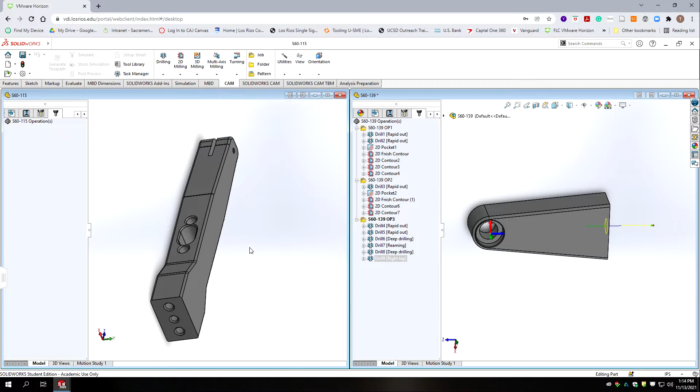So let's look at comparing in SolidWorks our two parts that we're working on. So on the right hand side window I have the 139, which we should have programmed in the last class or last tutorial, and then over on the left we have our 115. Now if we approach this from a similar standpoint, where we start out in an orientation something like what we see here, on the 139 we milled off the end, we did the radius, and we did the hole over here. It's a different size, but we could do that.

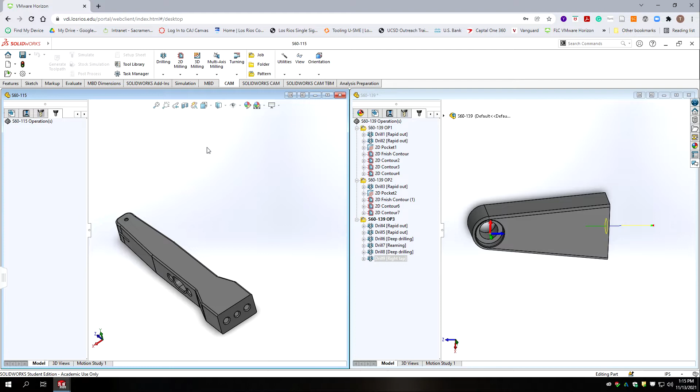And then we have work to do on the side here, and this is a flat plane that's parallel to the plane on the opposite side, so that could be a clamping surface. And then we have this slot that needs to be cut from the end with a saw. So the overall length of this part, if I were to measure it, is about 4 inches. So in a 6-inch vise we wouldn't be able to have both sides sticking out. So we'd have to assume that we're going to make a special fixture to make this. Perhaps the first operation is done on the vise, and then the following ones are done in some sort of dedicated fixture, and then perhaps we stand it up on end in a vise.

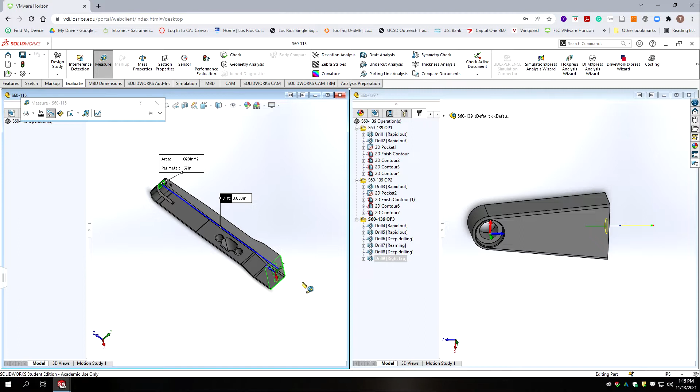But okay, so here we go. We're going to try to copy the operations, but I want you to keep in mind that our operation numbers may change. I just want to be able to recycle the code that we've used. So I know op3 was all the drilling in the end, so we definitely want to right click on that one and select copy and go over to the 115, right click, and we're going to paste that one in there. Okay, so it looks like it automatically added op4 to the number. I'm not sure if that's actually the op order it's going to be.

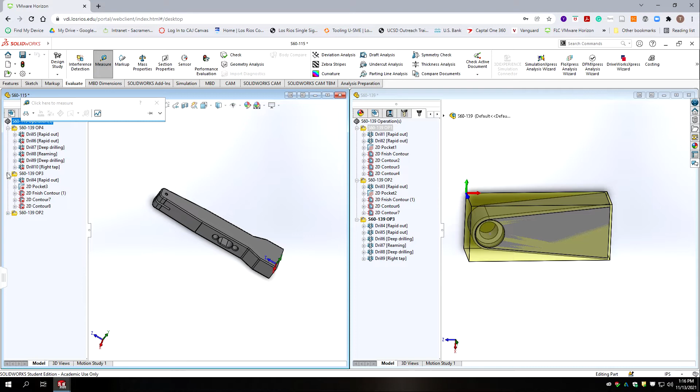And then we have this routine here. We're going to copy that one as well, and we're going to paste it. And then we're going to go over to the first op and do the same thing. Copy and then paste. Okay. Alright, so we're all out of order. We got different orders. Let's collapse this down. And I'm going to put them in the order in which they were done in the other part number. So if I were to drag them around, I've got them in the order in which they were done in the 139.

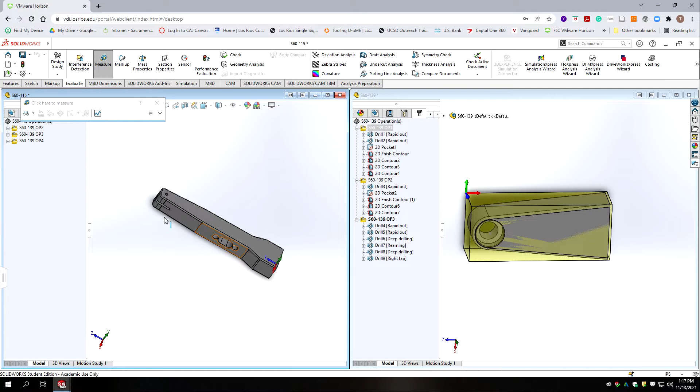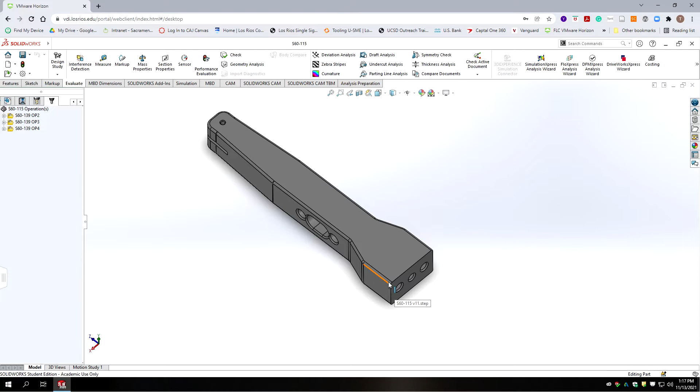Okay, so I'm going to go ahead and save in both files just to make sure I retain everything. Now I'm going to close the 139. Okay, let's expand it out. And I'm going to zoom to be in an orientation like you'd be in a vise where you're standing where the operator is. So again, we're going to be milling just enough down to get the radius. We're going to drill this hole. We're going to mill off the end. We need to make our stock. Okay, so let's go to what's called Op2 here, and we're going to rename it. First, the correct part number, Op1.

Okay, let's go into the setup. We're going to go edit. Yes, we're going to reassociate the geometry. So we've got our part, and I'm going to assume we can hold it in the vise for this first operation. Okay, so we've got the model highlighted. We're going to call this the 115 Op1 instead of 139.

We're doing milling. And on our stock, we need to set our origin before we mess with the stock. So our origin is going to be selecting Z, and we can select an X-axis on this one. So Z and X-axis. Our Z is going to be in the plane of the top of the material, X is along one of these parallel lines. Okay, and that's pointing the wrong direction, so we're going to reverse the X-axis. We're going to go to stock box point, and bottom corner 3 is fine. That's where it was on our last job.

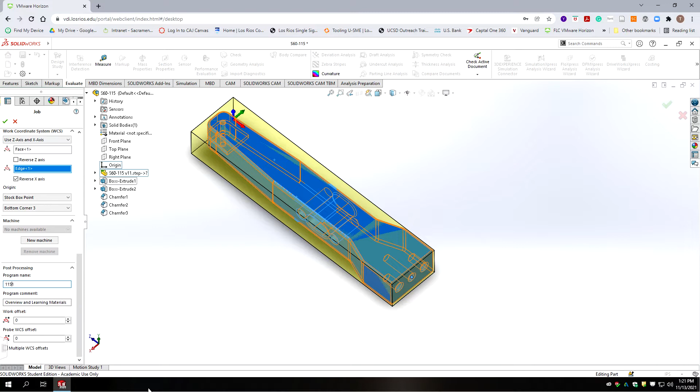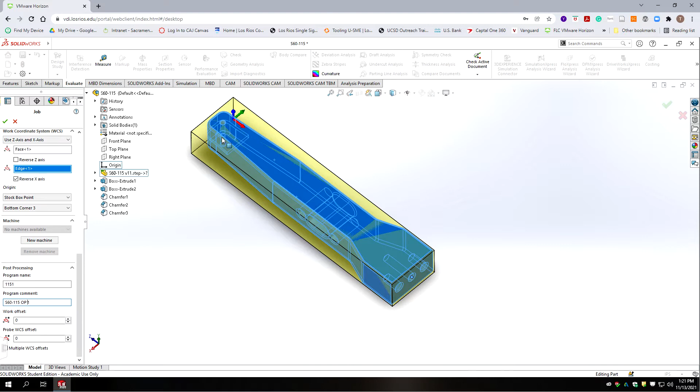Okay, we're going to scroll down. We're going to change our name from 139 to 115. And you might have caught this mistake in the last tutorial, but this should have been S60-115 Op1 instead of what I pasted in there. I had something else from Canvas accidentally in my clipboard. Okay. Alright, so we've got the stock now set up, and now we're going to start our machining.

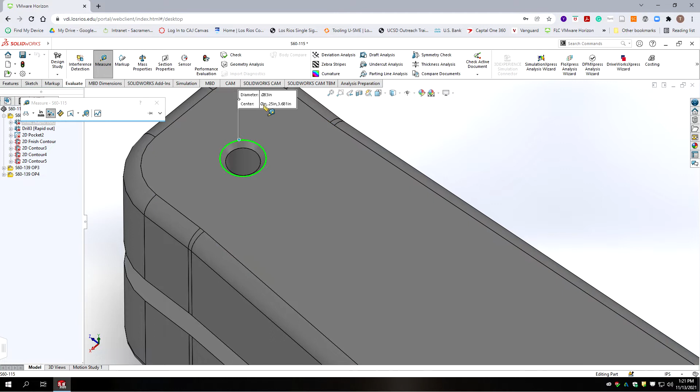So the first operation was a spot drill, and it spotted out a much larger hole than what we have here. So we're going to come in and evaluate what this chamfer edge is. So if you go to evaluate, measure, pick on the outside diameter, we have an 83 thousandths hole. Alright, so we're going to go back to this routine, go edit, yes, and we're going to keep the tool, we're going to keep all the feeds and speeds at what we did in the last one.

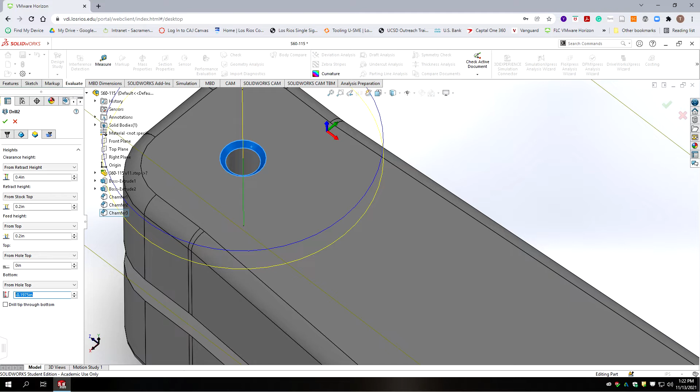We're going to select our hole, which is just going to be the chamfer surface, and then we're going to go to depths, and we're going to leave all this the same, except we're going to change this to negative 0.083, which is the diameter of that countersink, and we're going to divide that by 2. Okay, so we have a much shallower drill point. Okay, and we can keep the rest of this at default and accept. So we've got the first routine done.

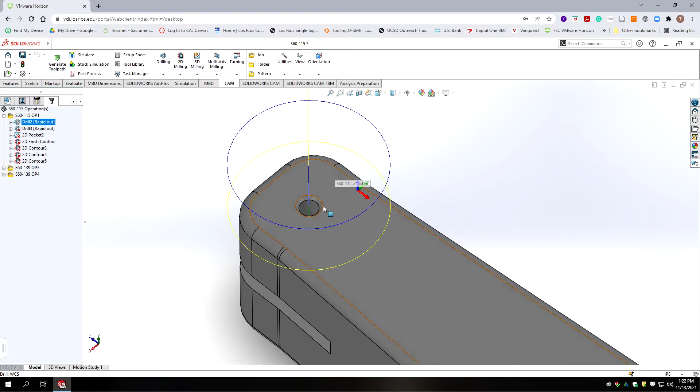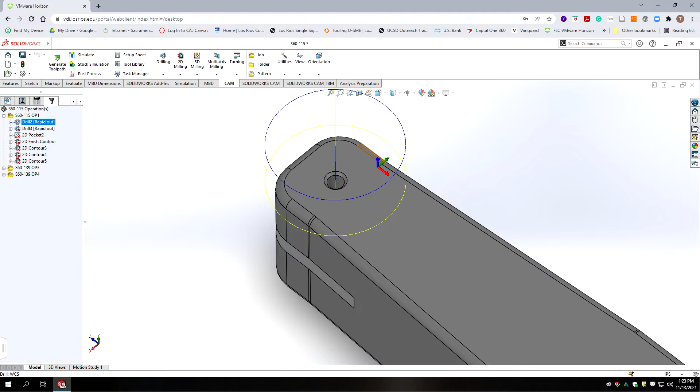Now, to follow up on that, we're going to go ahead and drill through the part. We have two choices. One, we can drill all the way through, or we can drill halfway through and drill the other halfway through from the other side. It's kind of semantics. With the small diameter of the drill bit, it could have some drill wander, but what you do to combat that is you do lots of small pecks. Okay, so we might have it wander a little bit and be off center.

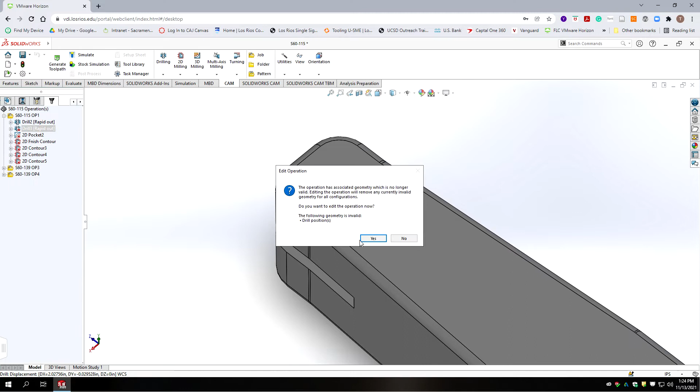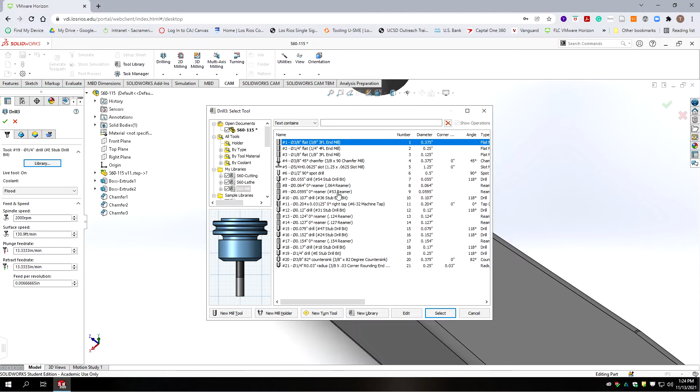Take the next operation. We could either edit it or we could delete it and make a new one. Let's just go ahead and edit for posterity. I'm going to pick that up and we're going to change our drill bit from a 1/4 inch drill bit to the drill bit that we would use preceding the press fit reamer. So our press fit reamer, it's the number 53 reamer. That was the reamer we were going to use. So the drill we use for that is the number 54 stub drill we're going to select.

It's reset its RPM. I think that 5,000 is too fast for steel, so we're going to go 2,500 with this small diameter one. We're only going to go 8 inches a minute on this, and our plunge rate is going to be 8 inches a minute, and our retract 8 inches a minute.

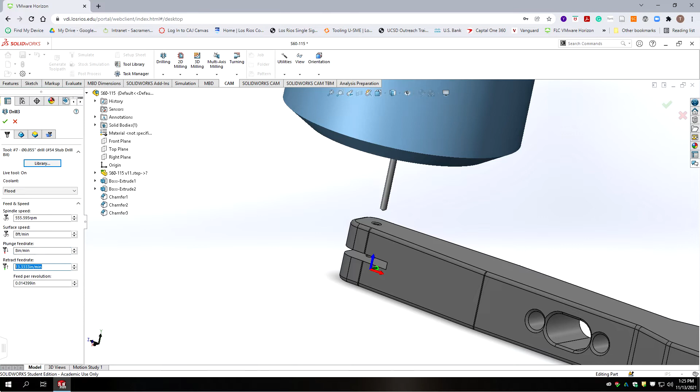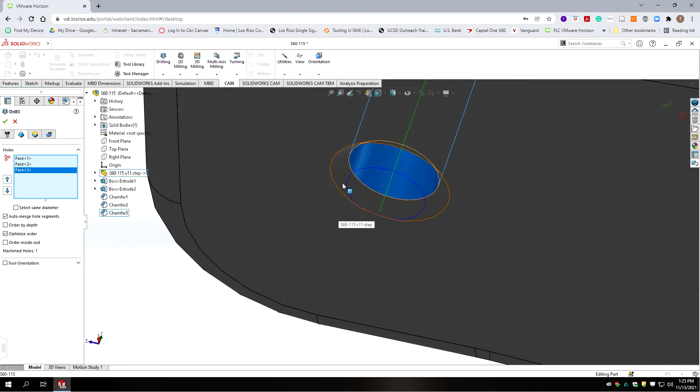Our next tab, we're selecting what is the hole we're going to drill. So we're going to start with the chamfer. We're going to do the cylinder, the cylinder of the opposite side, and then we need to rotate around and get the chamfer here on the opposite side. And we want to auto merge that so it treats it as one drilling cycle, not as separate drilled holes.

Okay. We're going to go to the heights tab. We're going to keep all the stuff at the beginning at default. We're going to go from top of hole to bottom of hole, but we're going to break through and we're going to go 10 thousandths deeper. So that's fine. It's calculating a different breakthrough value because it's a smaller diameter drill.

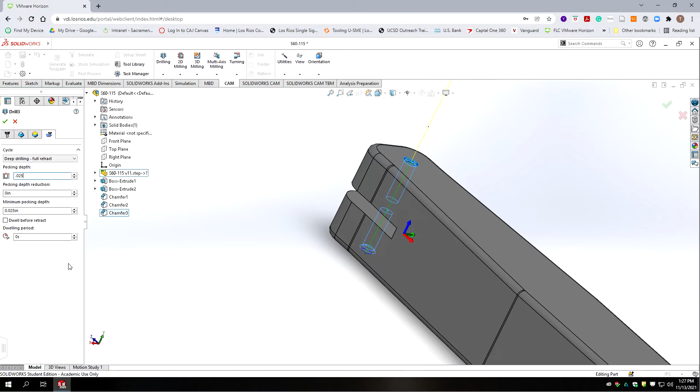The last tab, we're not doing a drilling and just rapid out. We're going to do a deep drilling cycle. And I want to go 55 thousandths drill. And if I were to go half of that, it'd be 25 thousandths. So 0.025. We're just going to leave that where it's at. And so it's going to peck until it gets all the way through.

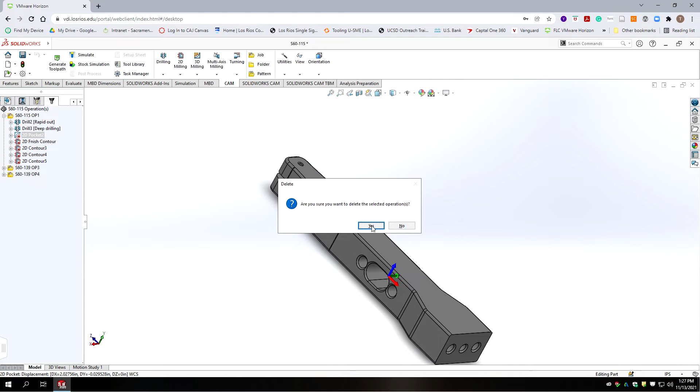Okay, so we've got our 16th drill going through real slow, lots of pecks. Probably take an hour to get through, but we should have a fairly straight hole when we do that. Alright, so now the next is the pocket, and that was to do the pocket for the bearing. We don't need that on this routine, so we're going to delete that. The finished contour, we don't need it for this operation, but we could possibly use it for this here. So I'm going to drag that operation down to op 3 and we'll deal with that later.

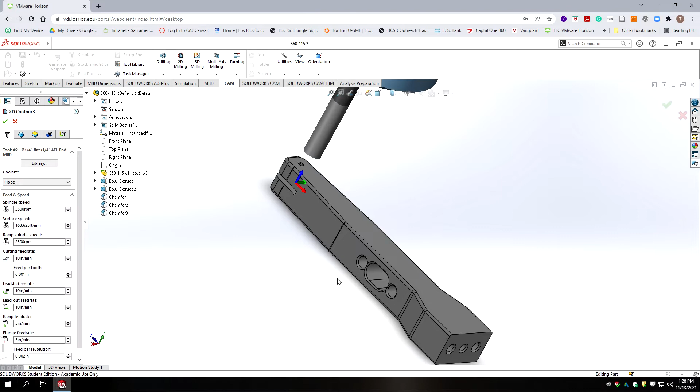Okay, so now we have our 2D contour, and that was with a 1/4 inch end mill. Okay, and I believe that trimmed off the end of the part over here as if it's sticking out the end of the vise. Okay, so we're going to keep all that at default. We're going to go to the next tab and we're going to select a different set of edges. So it's here, and it gives us a crossed. We're going to go to heights, and we should be able to leave everything as it is. It's going to go to model bottom and then machine past by 10 thousandths.

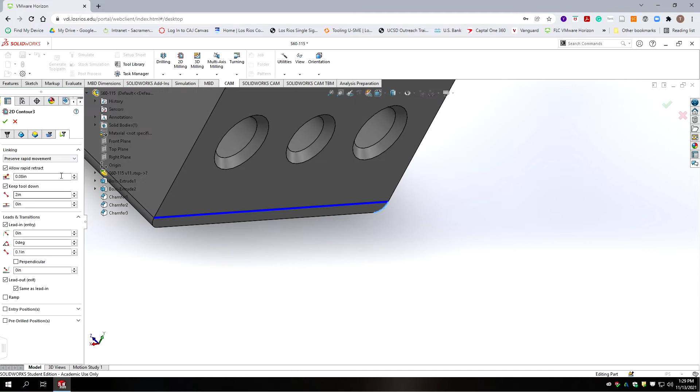Go to the next tab, and it's all of our rough and finishing passes. If it worked on the last part, we'll use it on this one. Go to our last tab, and it looks like we can leave everything at default there. Hopefully it'll come out the same way. Okay, so we got our horizontal rough cuts, we've got our straight lead-ins.

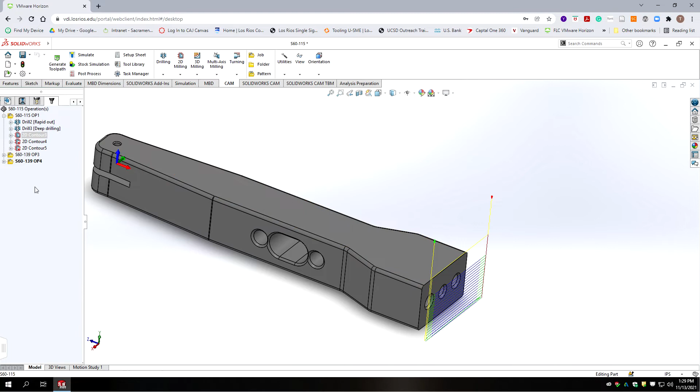The next routine was to clear out material so that we've cut down beyond the radius so that our corner rounding end mill can come around and have clearance. So we're going to right click on that routine, which is also the 1/4 inch end mill. Contour. We're going to keep the first tab alone. We're going to go to the geometry tab. We're going to select the first edge, and it should wrap all the way around. We're going to go to the heights tab. We'll leave all this at default. We're going to go 10 thousandths deeper, just like we did last time.

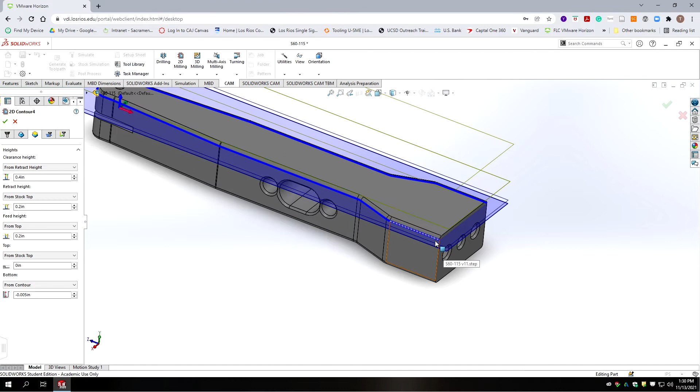And the roughing passes on the sides, I'm going to do a few roughing passes on the outside. It's really just going to cut air over here, but over here it should clear out quite a bit of material so that the corner rounding end mill doesn't touch anything on the scrap side of the part. Then we move over to the last tab, and we should be able to leave all this at default as well. So we select that, and we should get a routine that has 1, 2, 3 rough passes and then a finish pass, with it leading in from the edge.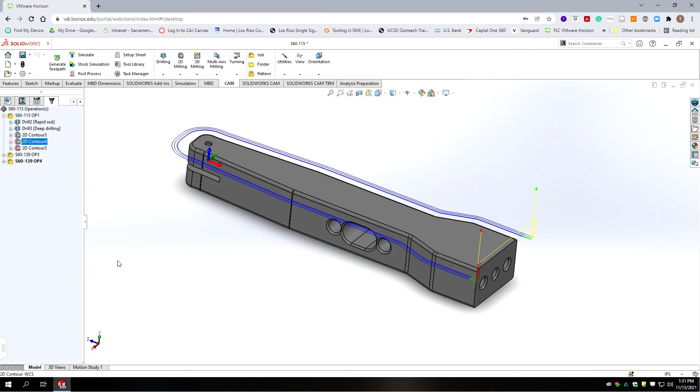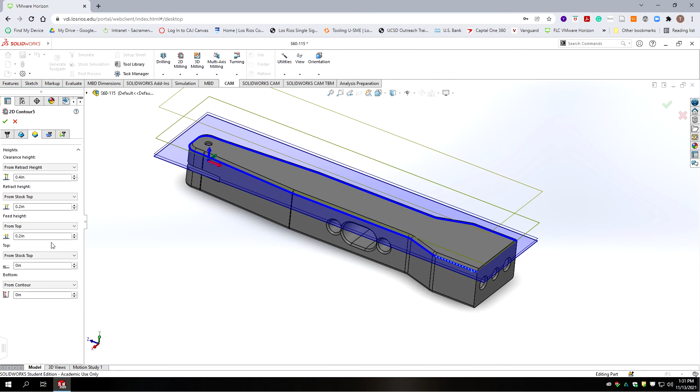Okay, and then our last routine is going to be the corner rounding end mill. And we're going to leave pretty much the first tab at default. Second tab, we're going to select a different path. Heights, we can leave those all at default. We can leave the 2D contour at default. And we can leave the last tab at default. There we go. So we got our corner rounding end mill that should be taking a single roughing pass and then a finishing pass. Okay, so we've now recycled all the tool path from the 139 part.

We now do need to add one additional new tool path, and that is the reamer for the 16th press fit hole. Okay, so we're going to make a new drilling cycle.

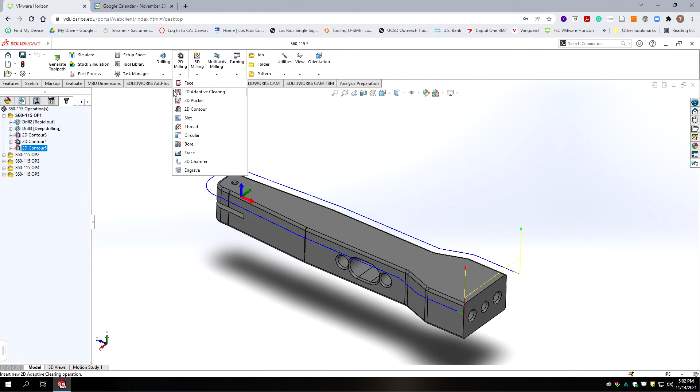Okay, and we're going to select that tool from our library. We're going to select the reamer that's undersized for a 16th pin. So I believe it's the number 53 reamer here, tool number 9. We're going to select that tool. We're going to stick with the speeds we have here, except we're going to slow down the feeds.

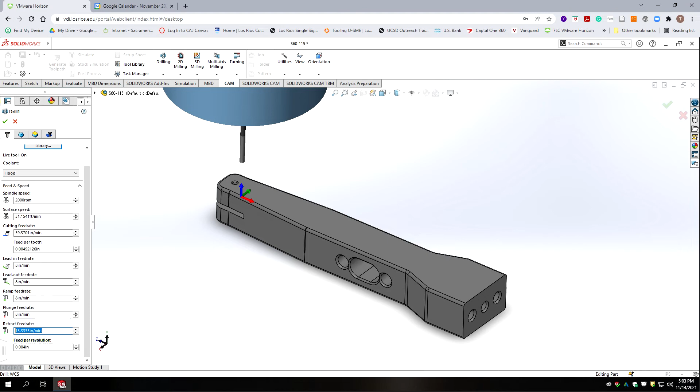I'm going to go 10 inches a minute, actually we're going to go pretty slow with this. This is a pretty small reamer. Let's go 8 inches a minute. And on all of these. Okay, and we're going to select our hole features, which are going to be the same as the corresponding drill features that we had selected before. Okay, and it's going to auto merge those into the same drilling routine feature.

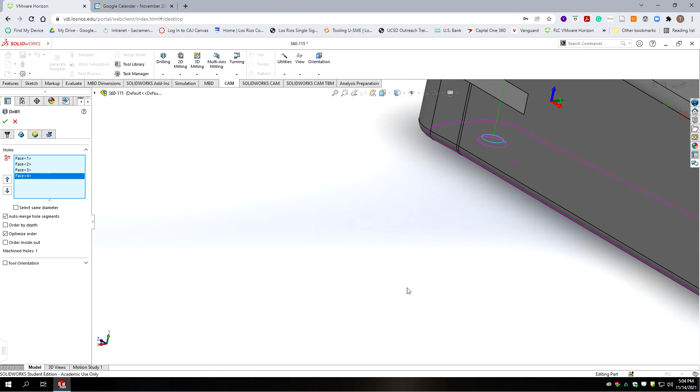Okay, and then we're going to go to heights. We're going to leave all this other stuff to default. We're going to go from hole top, and we're going to go to the hole bottom, but we want to go a little bit deeper, make sure our chamfer clears. So we'll go negative 0.01. And that should be fine because our drill bit went a little bit farther.

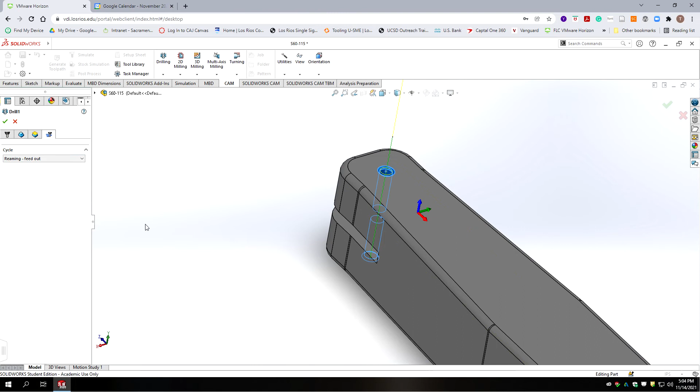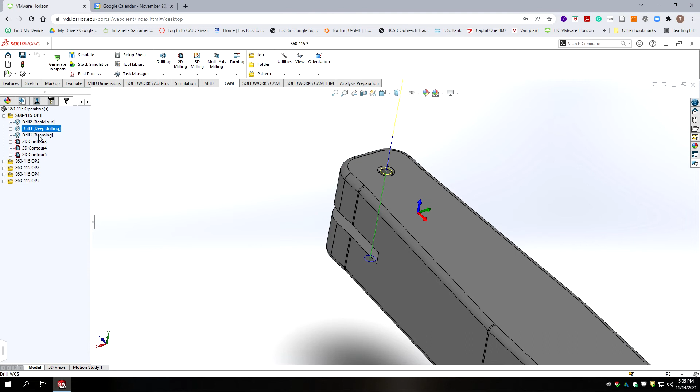Okay, then we're going to go to our next tab, and we're doing reaming, feed out. We're going to leave that at default, and we'll accept that toolpath. Now sequence-wise, it's not really where we want it. We want it to go from the deep drilling right to the reaming, so let's move that up in the tree so that it occurs right after the drilling that preceded it. Okay. Alright, that's it. Now we're ready to move on to the next routine.

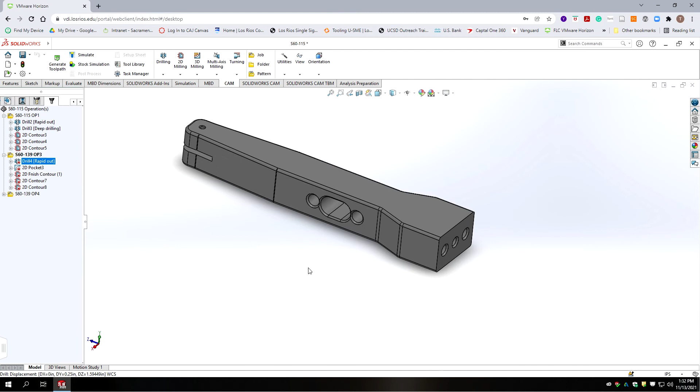Now we're going to go to Op 3. So right click on it and make it the default folder and expand it. Okay, our 2D finish contour that I selected there was for the bearing. I thought we might use it in the future. We're going to kick it down to the next op just to get it out of the way. So now we have flipped the part 180 degrees and we're looking at the opposite side.

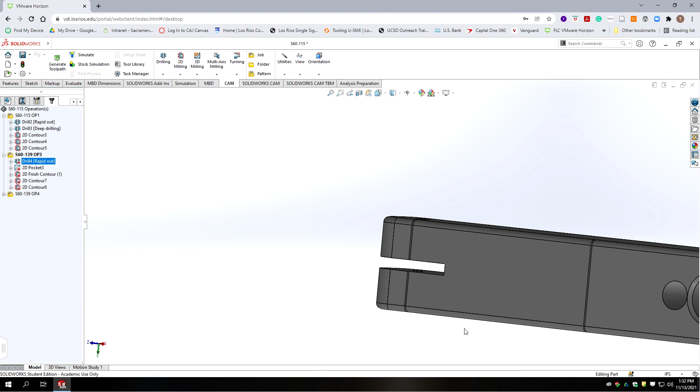So I'm assuming we're going to use a fixture. We're probably going to use the same scheme where we use this hole for location. And then we've got a clamp over on this end. So like in the last one, we had to create a point in order to select our origin. We're going to use that as a reference.

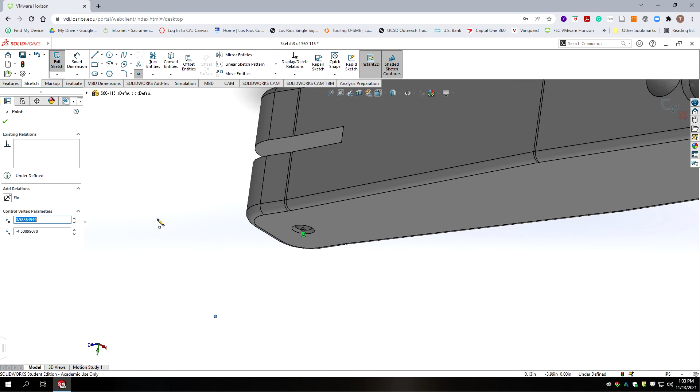So we're going to go to sketch, and we're going to sketch on the face here, and we're going to create a point that's at the center of the hole that we're going to use as our pin reference. So that was drilled from the opposite side, so the location of the top of the hole should be very accurate. Okay, so we've got a reference we can use. Now we're going to exit that sketch.

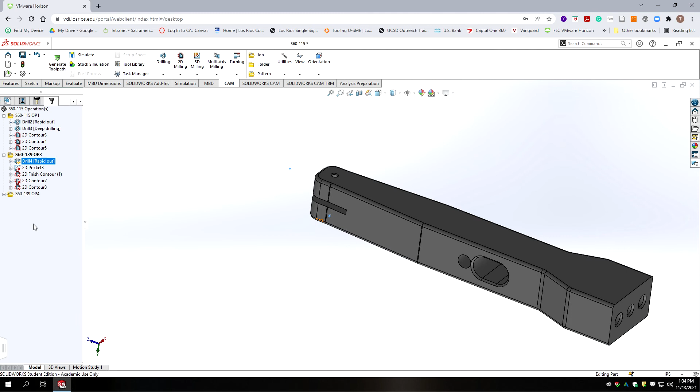Okay, it's given some warnings, but it's because we've copied toolpath and it's warning us that some of our toolpath is ineffective, and that's fine. We're going to regenerate all of it anyway. Okay, so now we're going to set up our stock for the second side. So we right click on the operation and we're going to go edit. Yes, we know we're reapplying geometry. Okay, so we're going to change the name to the 115. That's op 2.

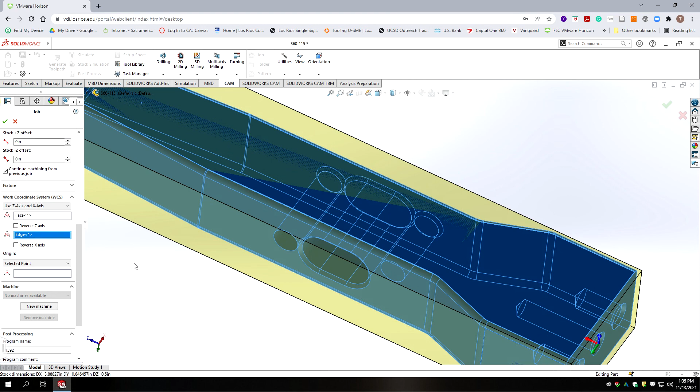Okay, we're going to scroll down and we're going to reset with a Z and X axis. So we'll pick the face as the Z-axis, and we're going to select as the X-axis one of these horizontal lines, and we want to flip the orientation so that the X-axis is positive to the right. And now we're going to go to our selected point that we created in our sketch as the origin point, and that way our tooling is based on the origin being at the center of that pin.

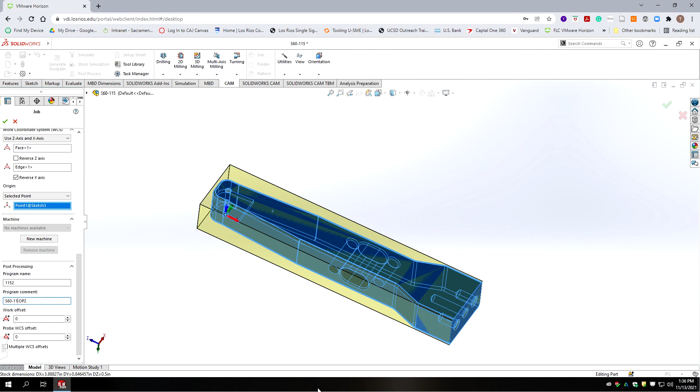Alright, now we slide back up in our menus, and again we have no extra stock on the right, but on the left we still have extra stock. We have stock all around the part, so that worked out well. Now we're going to zoom down and we're going to change our number from 139 to 115, and this is the 115 operation two. Okay, so we have the stock all laid out.